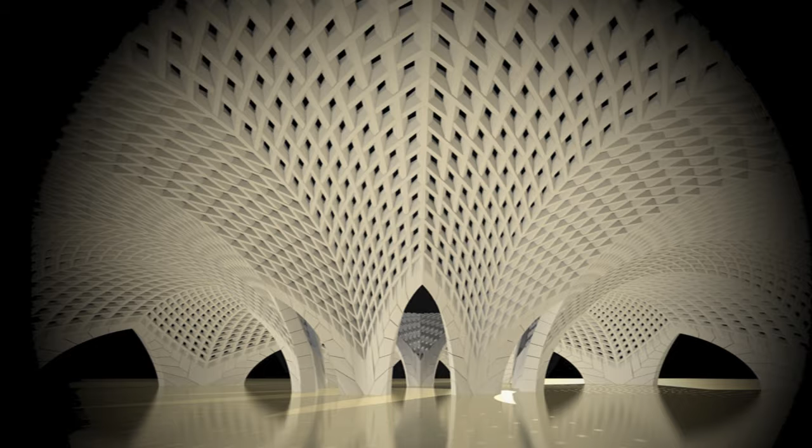The interest around stereotomy started to reawaken in the early 1990s within the research about the history of construction. This new favorable cultural climate has allowed rediscovering the discipline, both for its historical value and the unexpressed design possibilities. The diffusion of parametric modeling and digital fabrication tools creates the ideal condition to design and build new themes of stereotomic design, characterized by considerable architectural and geometric complexity.

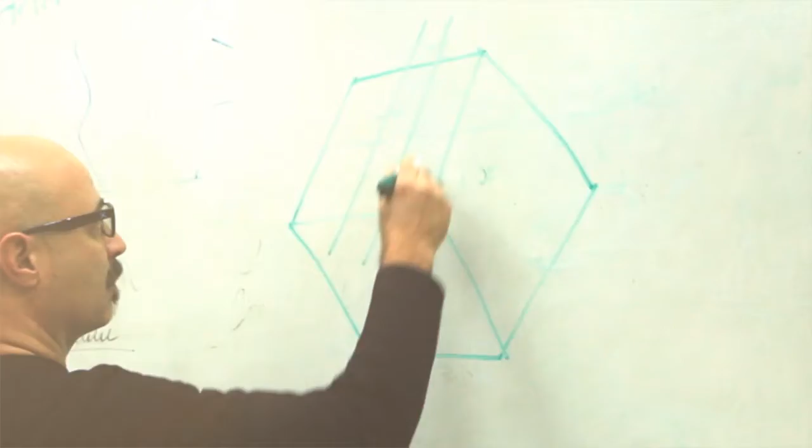Stereotomy is a know-how for designing. For this reason, it is important to know its history, to preserve it, and to continue to spread it. Speculation about architectural form based on the use of stereotomy marked a historically relevant peak between the 16th through the 18th century, followed by a sudden break at the beginning of the 19th century.

From the half of the 18th century, as a result of a change of Weltanschauung, a world vision, classical stereotomy began to show indelible signs of weakness. It was considered unable to produce anything but super-performance structures, which failed to meet required needs. Blondel asserted that a good architect had to prefer verisimilitude naturalism to the pretension arrogance of stereotomy.

On the other hand, it is worth mentioning that in those very years, stereotomy was turned into a school subject, thus reinventing itself. This structure was performed at the time in the École du Génie de Mézières, one of the first military engineering schools of Europe.

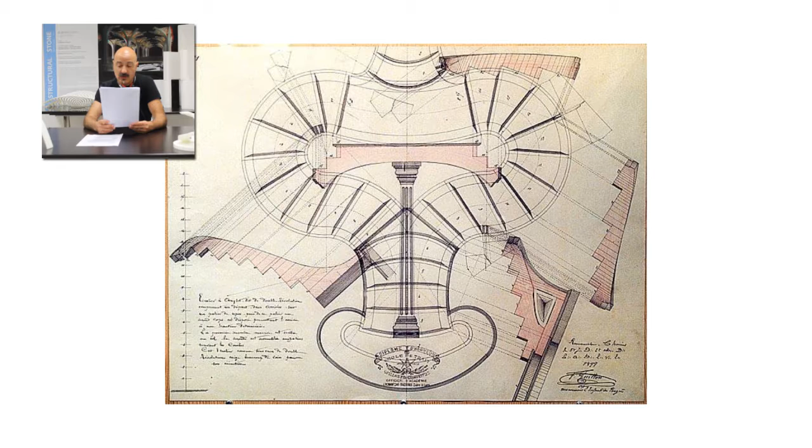From its establishment in 1748, before the coming of Gaspard Monge, the teaching of stereotomy went beyond the sheer utilitarian aspect of declining technique. The founder of the École du Génie de Mézières explicitly specified, "This art provides such an exact and accurate knowledge of the drawing of the plan and surface and the way of expressing the relief they propose to represent to be considered by the same standard as Euclid's Elements."

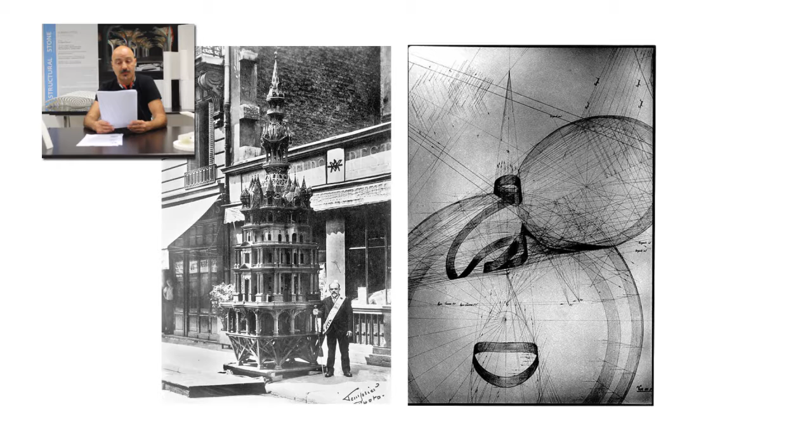The École des Beaux-Arts and the École Polytechnique, representative of the fields of architecture and engineering respectively, share from the beginning of the 19th century the common teaching of the subject of stereotomy, although they have specific curricula and teaching programs. This subject was regarded as the most appropriate in encouraging students to build space and stimulate creativity. In those years, stereotomy became the pivotal subject in the first year of education of both the students of the École des Beaux-Arts and the polytechnicians.

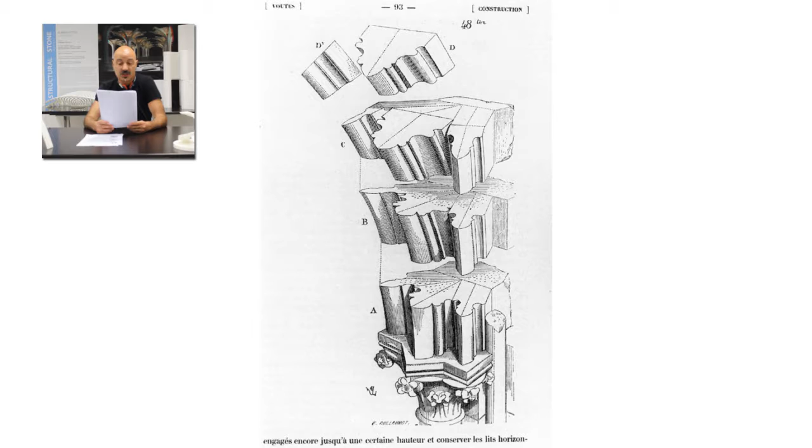We know that the great 19th century architects studied stereotomy during their basic formation, just to name some of the great ones: Eugène Viollet-le-Duc, Antoni Gaudí, Filippo and Ernesto Basile, and so on. It's clear that this specific knowledge has pushed their projects into innovative architectural realization.

Right now, is it possible to think that the marvels of French, Spanish, and Portuguese stereotomic construction between the 16th and 19th century are only tied to historical memory? Is it possible that the secrets hidden within the magical vault of the City Hall of Arles are no longer applicable to the architecture today? Is it possible to believe that the technical knowledge of such vaulted space of European tradition, and in particular of the Mediterranean basin as a cradle of origin of stereotomy, has been lost to us?

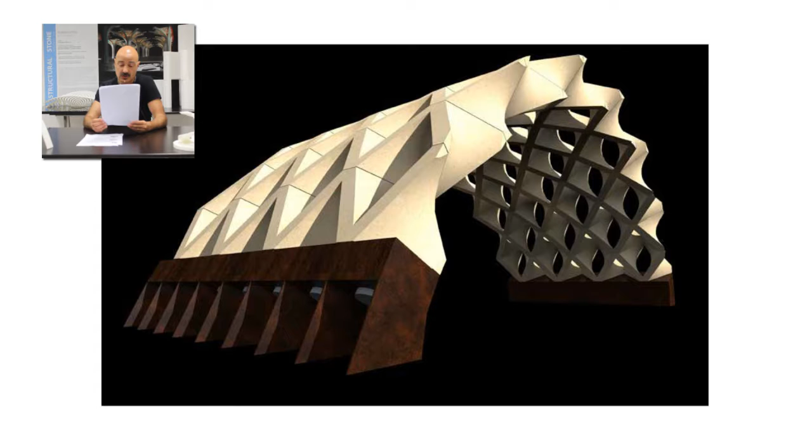Is it possible to believe that the ancient language of stone architecture has been divorced from the modern structural system and method of construction? I believe not. I believe to the contrary that the need to return to the construction of stereotomic vaults, renewed by a modern architectural vocabulary that celebrates the materiality of stone, is of extreme importance today.

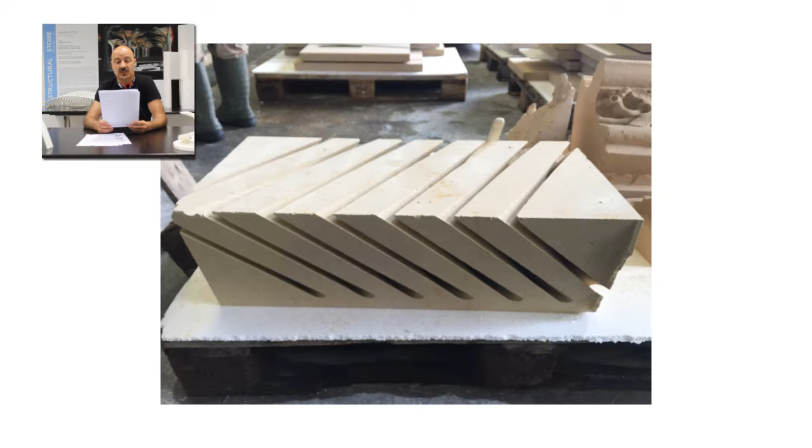I firmly support, and thus I want to highlight here, the importance of reintroducing the study of stereotomic culture among the main basic teaching within the architecture and engineering degree courses all over the world, as it was in the past. I emphasize that although stereotomy has nowadays no place whatsoever in both new building practice and structural plans of education, the subject starts to become a focal point for interesting high-level speculative research, not only the results of partial and isolated research in the riverbed of history of construction.

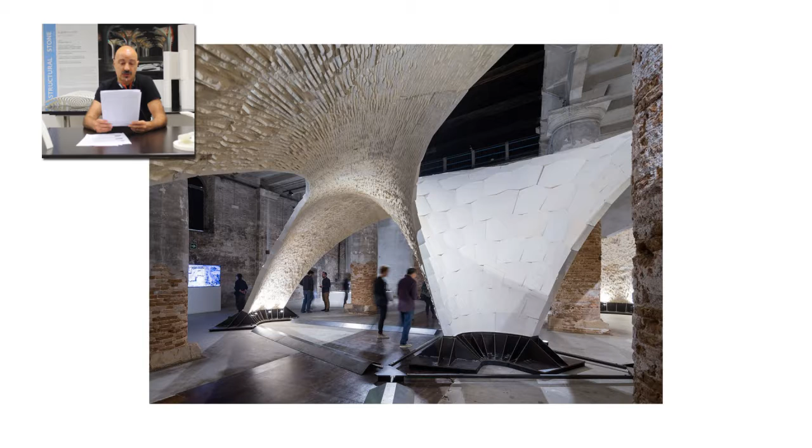Just to name some of the great ones: Philippe Block at ETH of Zurich, Brandon Clifford at MIT of Boston, José Palacios and Enrique Rabasa at ETSAM of Madrid, my group of research, New Fundamental Research Group, and many more.

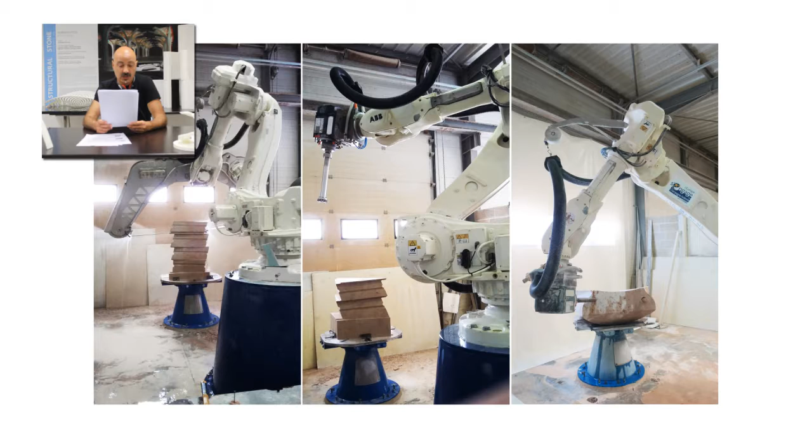The aim of this research is to close the distance between practice and theory through the realization of some demonstration projects. These stereotomic prototypes describe an effort to demonstrate new applications, features, shapes, and unexpected and unexpressed potential of stone for a new contemporary design. The idea is to help transfer and spread newly appearing design technology, education methods, and digital modeling supported by information technology in architecture.

It is important to note that most of the formal invention and application, especially for stone, derive from the knowledge and reflection of the architecture of the past. The study of ancient monuments makes it possible to understand technical and building expertise and attempt to go further, following the famous phrase of Bernard de Chartres, who said that one could look further by standing on the shoulders of giants. Here we are on Philibert Delorme's shoulders.

The study of the past helps and trains us to beauty. Let's go back to the conceptual basis of the discipline.

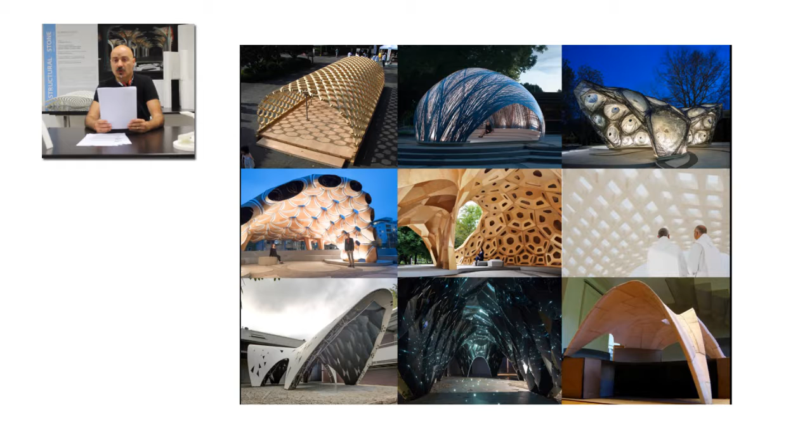If we observe the current research on the construction of form or form-finding speculation, we can notice a great attention to curved space and vaulted pavilions. I'm sure there is a constant, innate, and perhaps unconscious desire to represent the celestial vault, as the ancient idea at the base of the design of vaulted spaces of sacred monuments and cathedrals.

The vaulted space represents the ideal ambit in which to operate the most sophisticated and complex reflection on construction of architecture. This is particularly true for stereotomic architecture.

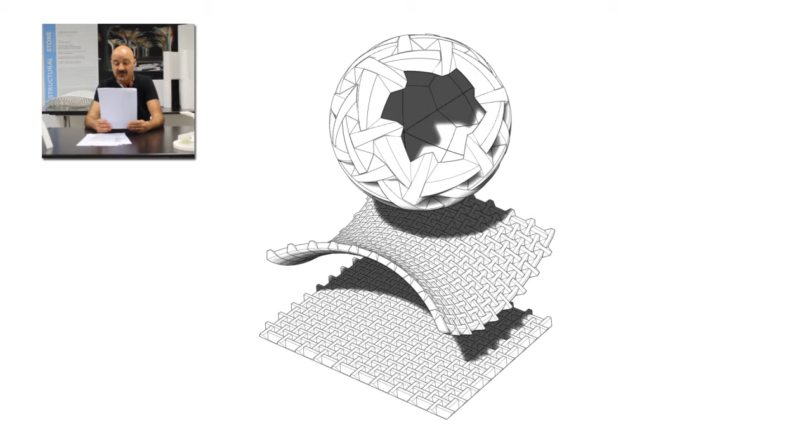The curved shape, with any mathematical complexity, can be designed and built in two basic ways: with a tool that can draw the curve, for example complex algorithm, or by operation of bending and deforming a simple basic shape. This is totally attuned from a topological point of view.

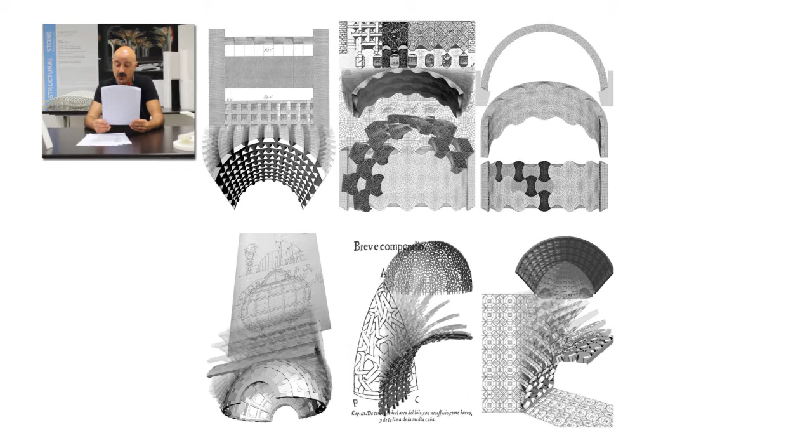The idea of potential flexibility and manipulation of lithic vaulted space is at the base of the method that links topology to stereotomy. The idea starts from a very simple consideration: the observation that most vaulted systems can be imagined as a discontinuous structure, like a masonry wall, that has been folded or deformed in order to obtain its geometrical final structural shape.

For example, a stone wall can be theoretically bent to become a barrel vault, and going on can be bent to become an annular one, and thus become a helicoidal barrel vault.

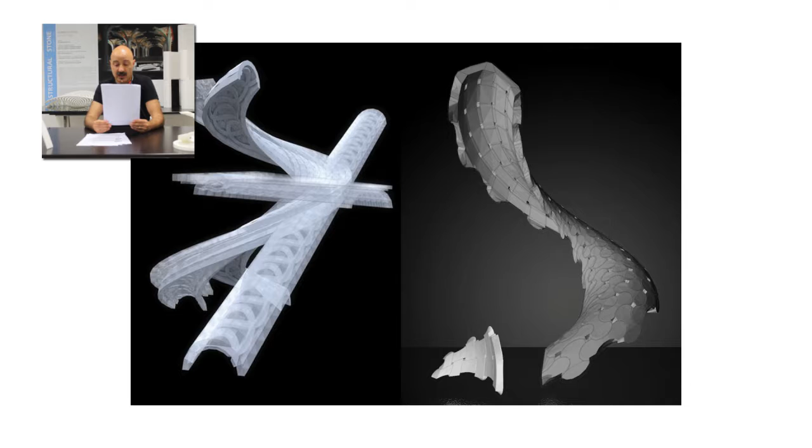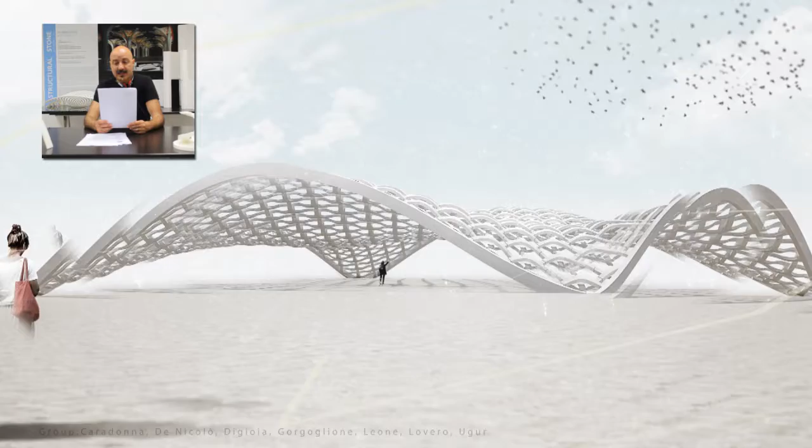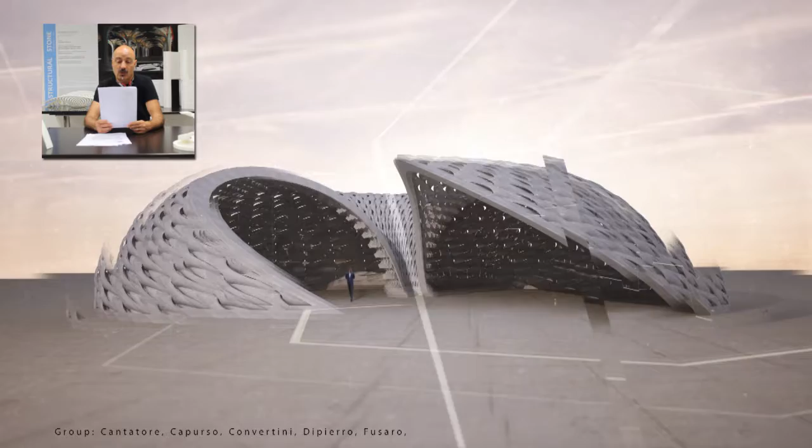The method becomes very interesting when more geometrically complex ashlar is considered instead of individual cubical blocks. At the end of the formation process, the more complex ashlar assumes a conformation that cannot be conceived through canonical three-dimensional modeling. This method uses the technique of bending, thanks to software providing three-dimensional modeling and the parametric variational one, thus basing on a topological geometry and its function of deformation.

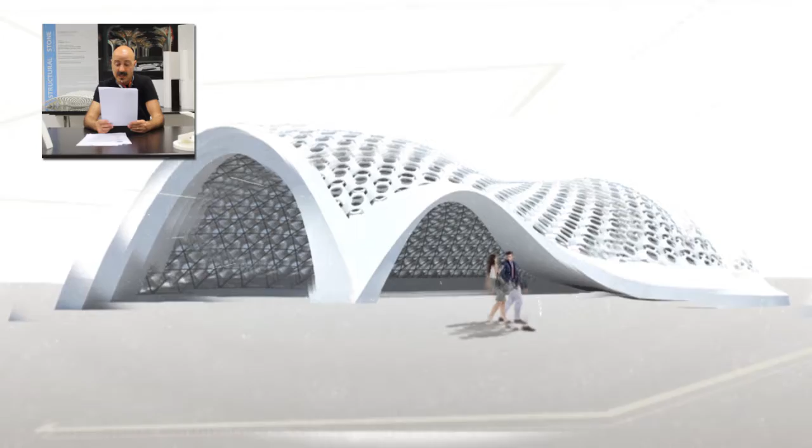As already stated, from a topological point of view, a plan and its rolled and deformed final shape are equivalent. This method has been used by me during the first phase of teaching in Design Studio classrooms, with excellent results for designing numerous new-generation vault systems and spaces, and for the production of expository prototypes presented during cultural events since 2005.

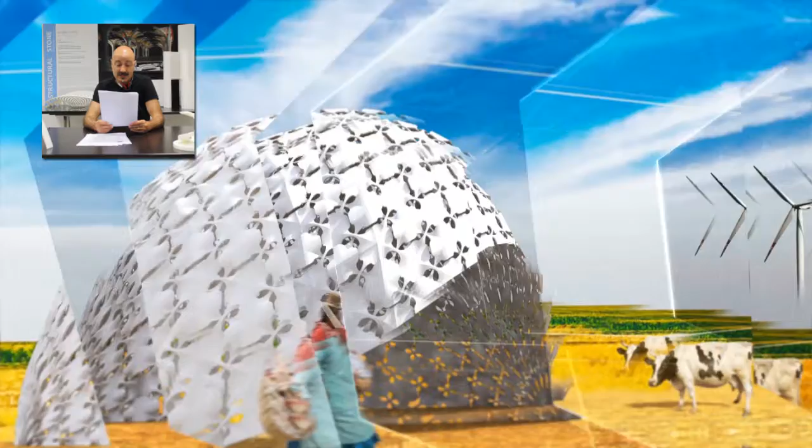Starting from the study of this specific traditional ashlar, it's possible to invent new geometry for the tessellation of vaulted space: planar configuration, vertical or horizontal, cylindrical shape, and geodetic spherical geometries.

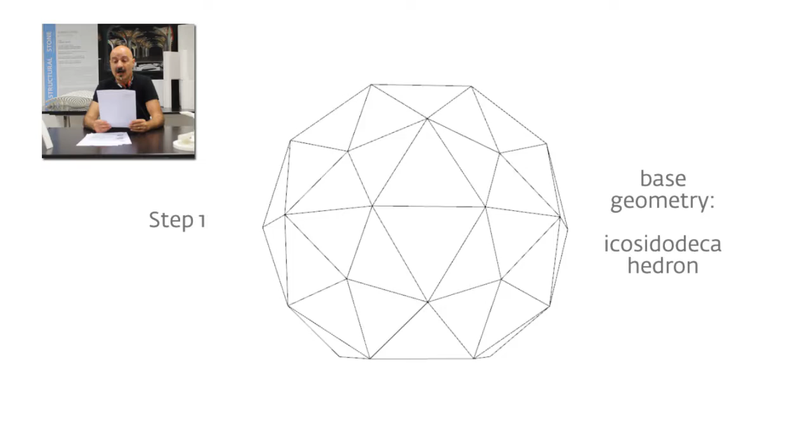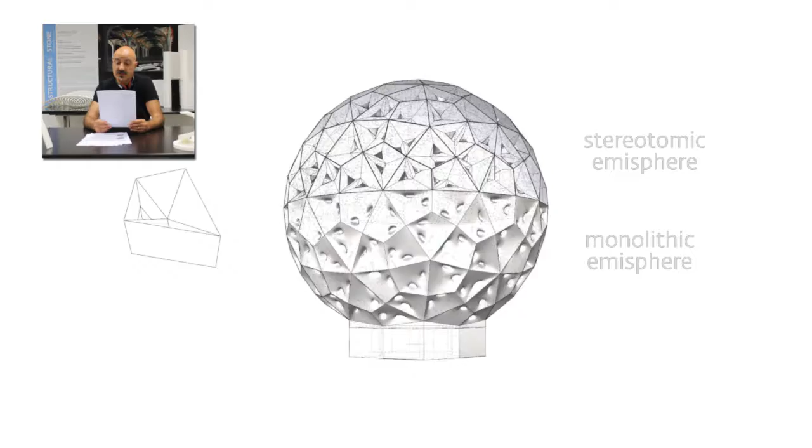A new family of stereotomic vaults, set out from the reinvention of stereotomic culture, can be formalized using new digital tools. This perspective aims to solve some of the most important theoretical issues related to the realization of the vaulted space.

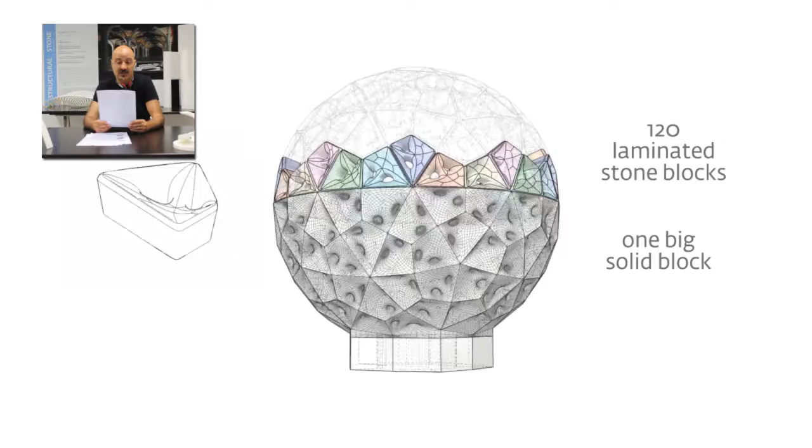Improving mutual anchorage and therefore the friction among the ashlar of the vault system, reducing the wall thickness, designing subdivision ashlar of the vault both for ornamental and structural behavior, varying the shape and the vault system in a parametric way.

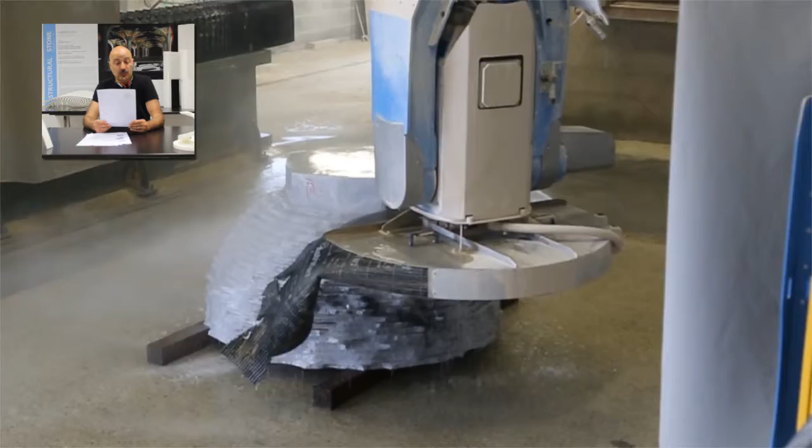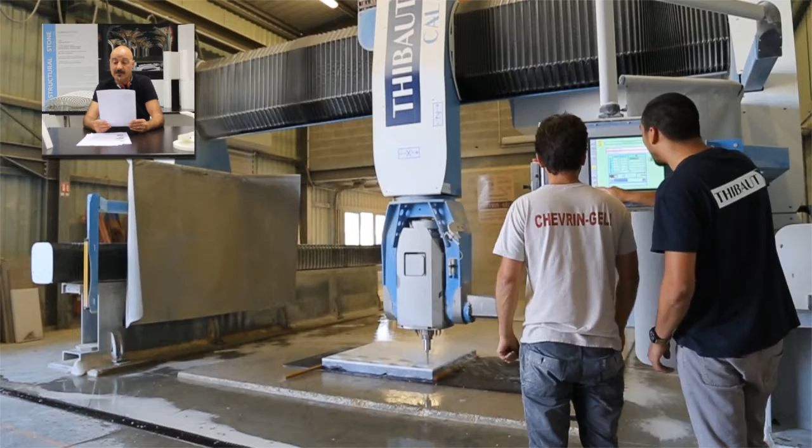Automatically obtaining all the geometrical data both from manual and electronic cutting CAD, CAM, CNC systems for the cutting of individual ashlar blocks, automatically providing all the numerical data aimed at structural analysis, rationalizing the number of standard ashlar for the construction of any complex vault structure.

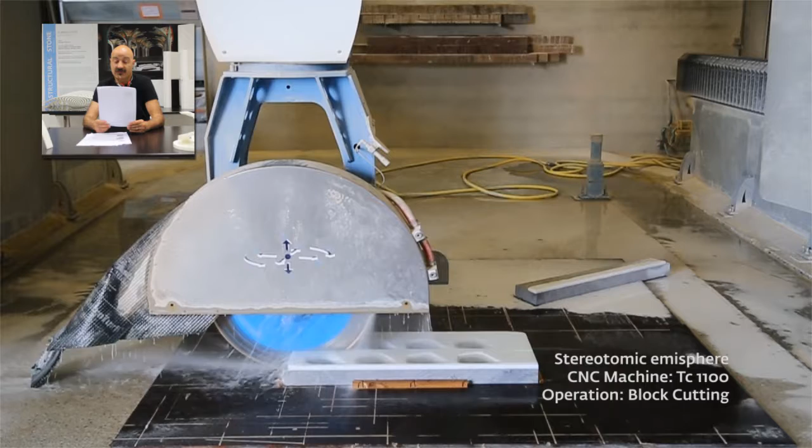Philibert Delorme affirmed that architectural production based on the use of stereotomic culture has been constantly focused on the game of paradox that could ensure heavy stonework while at the same time seeming to be an aerial structure, suspended in air, airborne.

In this regard, the celebrated vaults realized in Chateau d'Anet are paradigmatic. The most famous one is the conical vault trompe of the Cabinet du Roi.

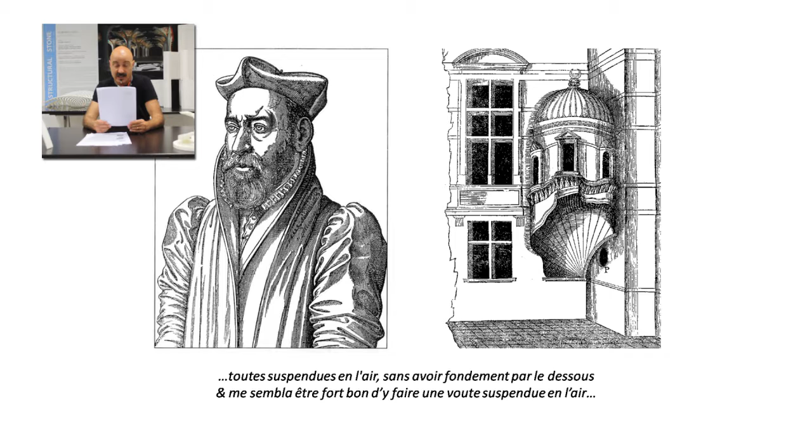Despite the heaviness of the stone, such architecture must defy gravity, sending a dynamic and antistatic tone derived from the ethereal sky. The dialectic contamination between the heaviness of the stone and the lightness of the aerial or pneumatic form of the starry sky, of stereoma or firmament, is the main lever of my research.

For many years now, I've been investigating the morphological potential inherent in this assumption as a conceptual foundation for the updating of stereotomy and stereotomic design.

As mentioned, the paradox is a constant in the logic of stereotomic design, aiming at formal lightness starting from an opposite material condition. The first poetic paradox of stereotomy was described by Charles Perrault, in what I consider the best definition of the intrinsic meaning of the term: the stereotomy is the art of using the weight of the stone to enhance the lightness of the form, thus claiming the combination of weight versus lightness in the same architectural vault system.

The desire is to share the stereotomic design culture all around the world, inside the academic method to teach architecture and design process. Thank you very much.